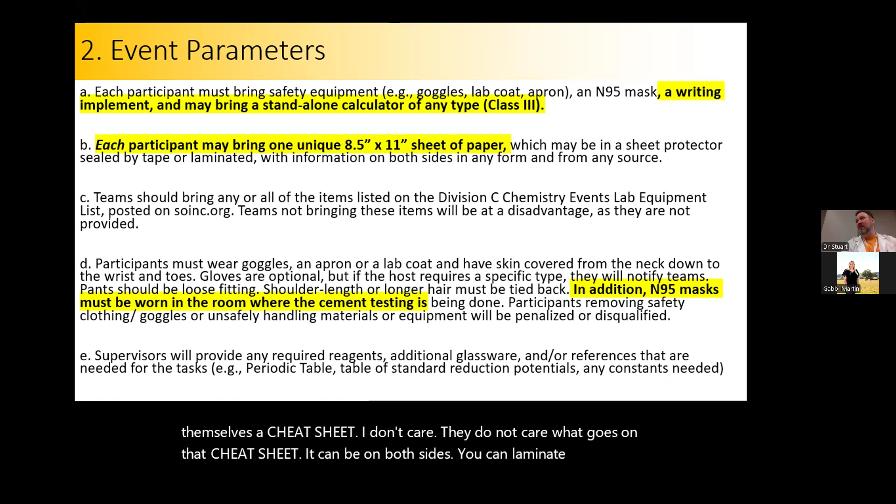Each participant may bring one unique 8.5 by 11 sheet of paper, which may be in a sheet protector or sealed or laminated with information on both sides in any form from any source. So they get themselves a cheat sheet. I don't care, they do not care what goes on that cheat sheet. It can be on both sides, you can laminate it if you want. We're not going to get that wet, but I also know what I was like when I was that age, and if I made that thing up even the day before, it would have been wrinkled, stained, and destroyed by the time I got to the actual competition, so it might be worthwhile laminating it just because I've been there and I know what that's like.

You can bring any or all of the items listed on the Div C Chemistry Events Lab list. Teams not bringing these items will be at a disadvantage. We're not going to provide everything that is on that list, but I would try to see too that for that lab component they would pretty much have all the stuff they would need other than their PPE.

Participants must wear goggles, an apron or lab coat, and have skin covered from the neck down to the wrist and toes. Closed-toed shoes - I spend a lot of time looking at people's shoes, and you guys are all well dressed for lab. Cover your sleeves, you might want to wear a lab coat to make sure your sleeves are covered, but yes, you're going to want to tie back that long hair. We may be working with open flames.

So I do have a funny story that I like to tell my students about working with open flames, because when I was in high school, there was a girl who was trying to impress the guy next to her, and there was an open flame, and she did that hair flip, and it goes right up the back of her long, kind of greasy hair, and it smelled absolutely horrible. She was freaking out, because people are smacking her on the back of the head, and her hair is on fire.

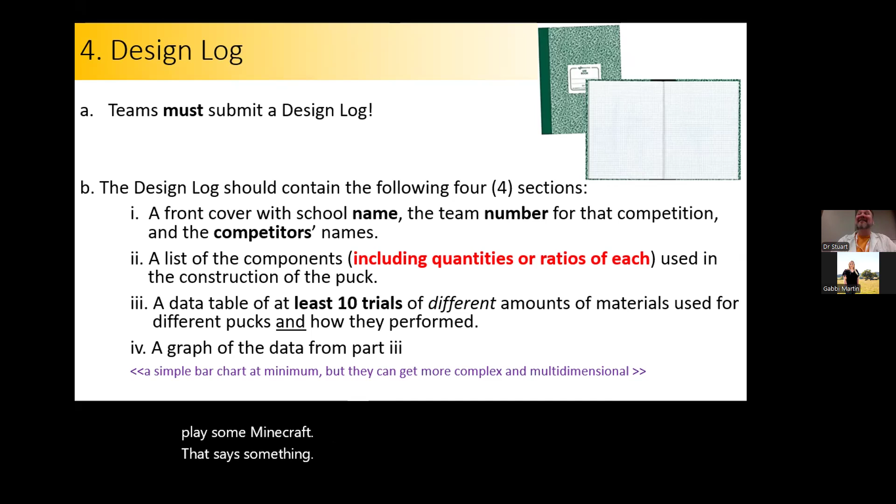For the competition part, when they're actually going to test it, we're going to be dropping these guys at heights of 20 centimeters to start, going up in 20 centimeter intervals until it cracks or reaches 100 centimeters. Tournaments will specify ahead of time what the pucks will be dropped on, and as of right now it is the lab floor - that standard hard lab floor tile stuff. I do not have a large steel plate in my possession, otherwise I would do that.

The puck testing may be done in the same room as the testing lab activities, in which case everybody has to wear their N95 mask. I will try to get us 2 rooms so we do not have to do that, because I know these things are uncomfortable.

Basically, if you're doing the lab portion, you got to wear your regular PPE. If you're doing the puck testing, it's all the things. If you're doing the test, it's none of them.

I do not think I'm going to be able to get 3 rooms. I will do my best to make people as comfortable as possible. Masks and goggles only need to be worn in the area where we're testing the lab stuff, and the mask only in the area where we're doing the drop.

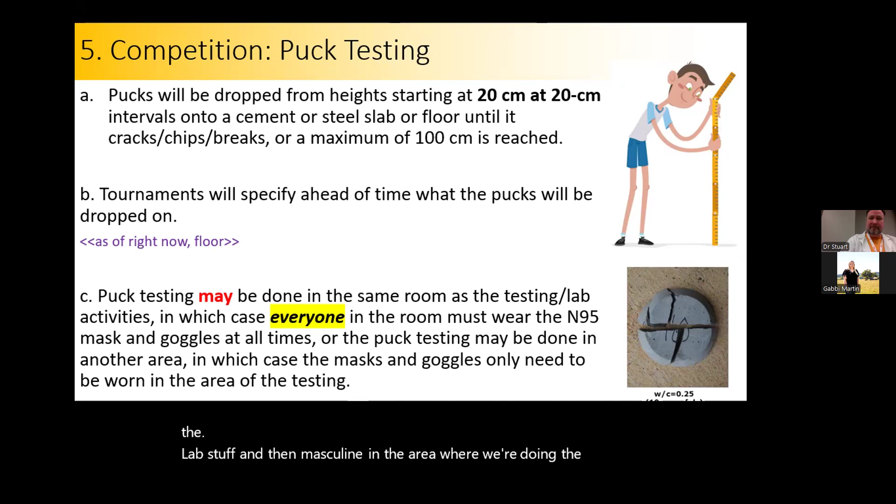All right, so pucks are going to be dropped by the students. And this is not how I would design an experiment. I would have one person consistently doing the drops, and I would have a machine doing it, but they're going to drop them. It is to their advantage to drop them as flat as possible and not throw them on the floor, but you never know. The puck should have 90-degree sides to the flat surfaces.

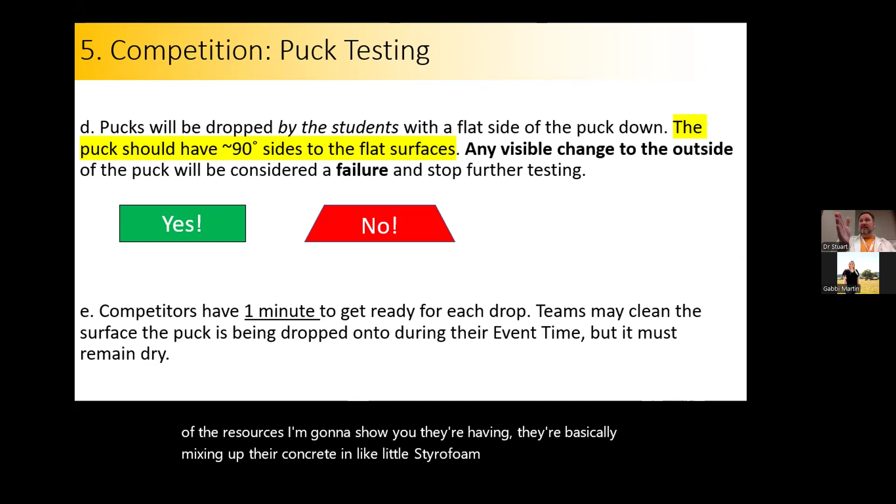All right, so that was buried somewhere in that. So straight up and down, cross, good. Slopey, no. Because if you look at that video from step 7, or one of the resources I'm going to show you, they're basically mixing up their concrete in little styrofoam bowls and using them, which is going to give it angular sides. So that would be a no. It's got to be orthogonal sides, right angles.

They have 1 minute to get ready for each drop. Teams may clean the surface the puck is being dropped onto during their event time, but it must remain dry, so they can't polish it up. They can dust it off, but they can't wash it off.

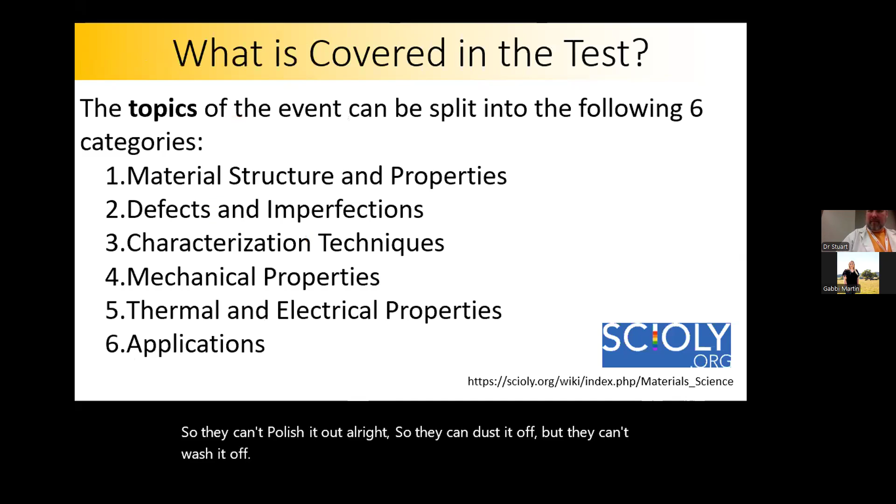All right, so that's the drop testing part. You guys have any questions about the lab notebook or how we're going to test these things? I think that part is pretty darn straightforward.

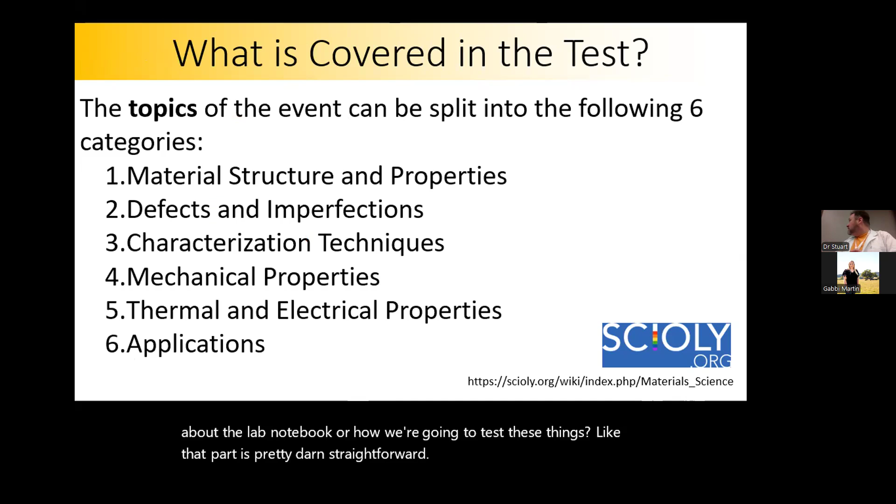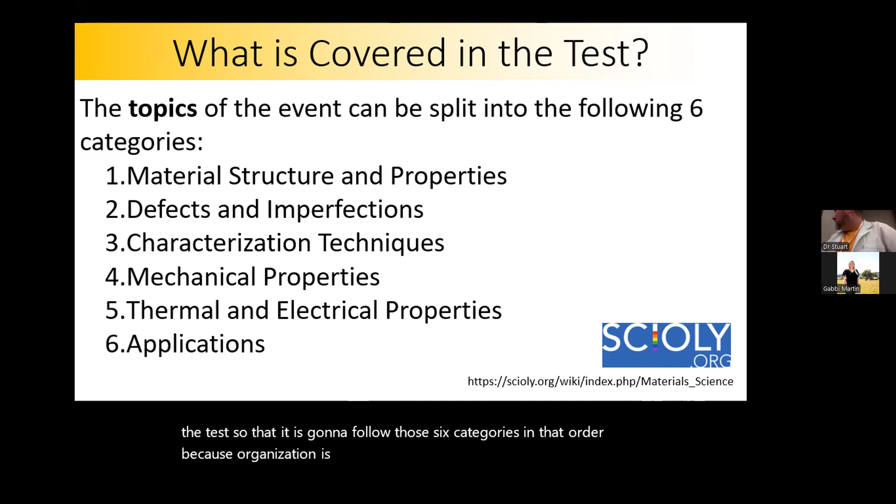Okay, the test. Now the test is not necessarily just going to be focused on concrete. There will be some concrete questions on there, 100% sure of that. But we've got a pretty big subject area to cover. The topics are going to be split into these 6 categories, and I will do my best to design the test so that it follows those 6 categories in that order, because organization is important, especially for little people. So we're going to talk about material design, material structure and properties.

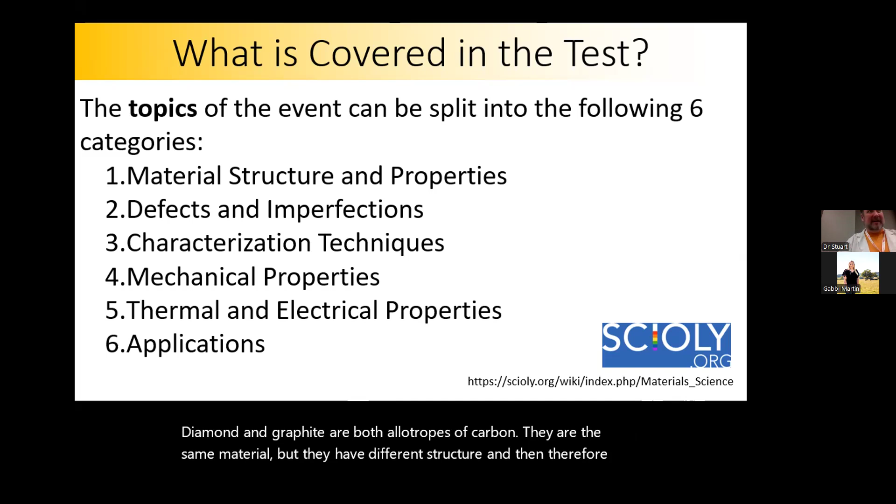So how does the structure of something change its physical properties? For example, diamond and graphite are both allotropes of carbon. They are the same material, but they have different structure and therefore radically different properties. Go try and get your fiancee a graphite ring, and you will find out that those have radically different properties.

Defects and imperfections — oftentimes we're looking at things in material science like, why did this bridge fall apart? So things like material defects and imperfections will be important. Characterization techniques are how do we know the structure of things, how are we going to classify our material?

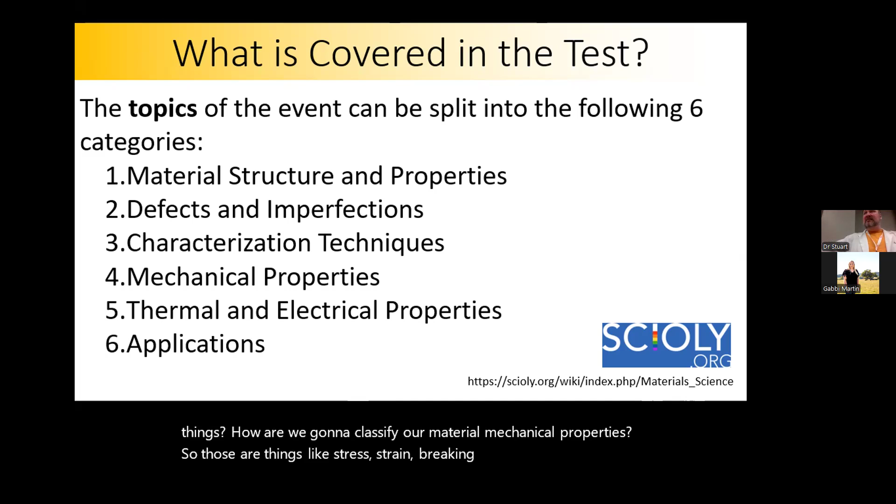Mechanical properties — those are things like stress, strain, breaking point, elastic modulus, all those physicsy things. Thermal and electrical properties — is it a good conductor of electrons or of heat? Is it a semiconductor? And then 6 is applications — what do you do with those things?

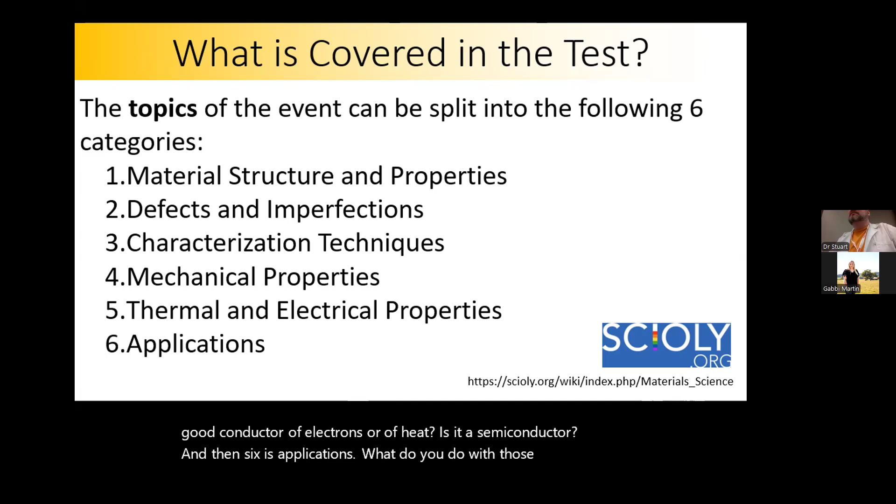If you look at the URL here, that is the SciOly wiki. That is going to give you lots of information about those 6 categories. So this is a really good jumping off place. That is probably the jumping off place I will use to make the test and be like, oh, these are definitely some things they should have seen and should know.

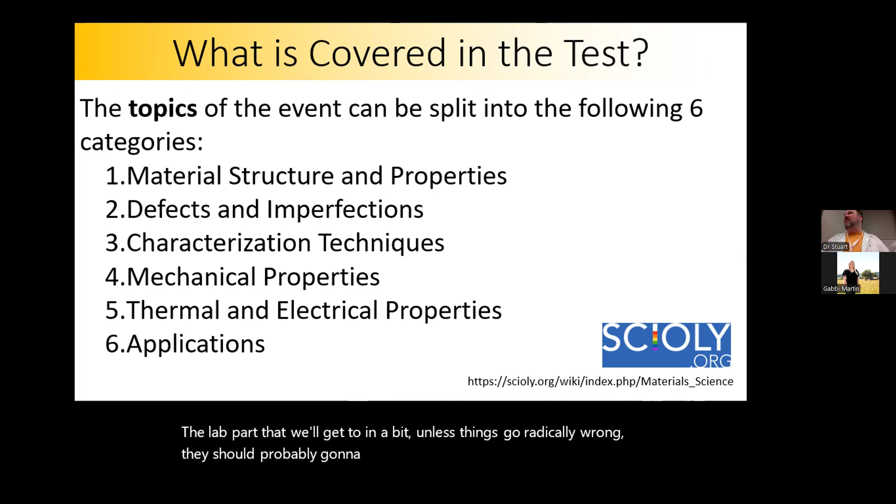I will probably find some things that are going to be a little bit harder, not necessarily pulled straight out of there, things that might make them think a little bit, because the test part, I think, is really what's going to separate one team from another team. The lab part that we'll get to in a bit — unless things go radically wrong, they should probably have roughly on-parity lab skills, I would think. And unless people do weird stuff with making their concrete pucks, that's probably not going to be a big source of difference. So it's going to be the written part.

How well did you keep track of stuff in your notebook? Do you have all 10 testing things? Do you pass the test as best you can?

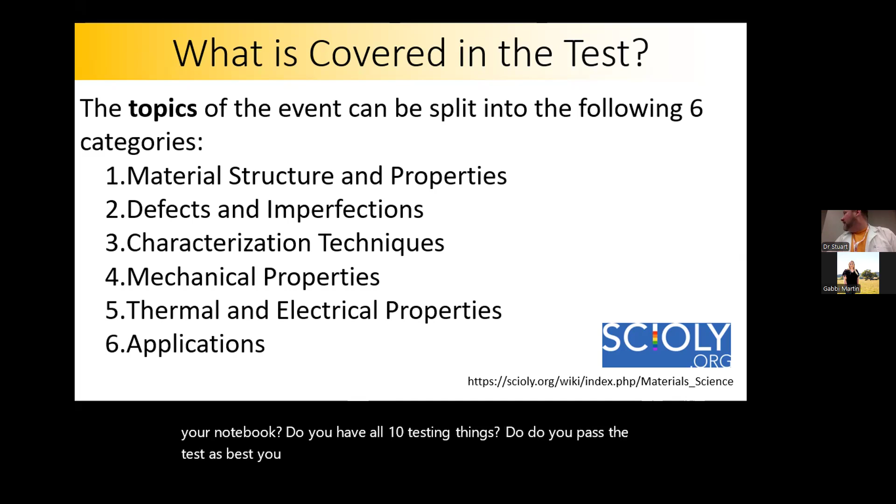That's probably where we're going to see the real differentiation, but we'll see—I've never run this particular event before. Last time I did detectors, and before that I did music, so we're in different territory for me.

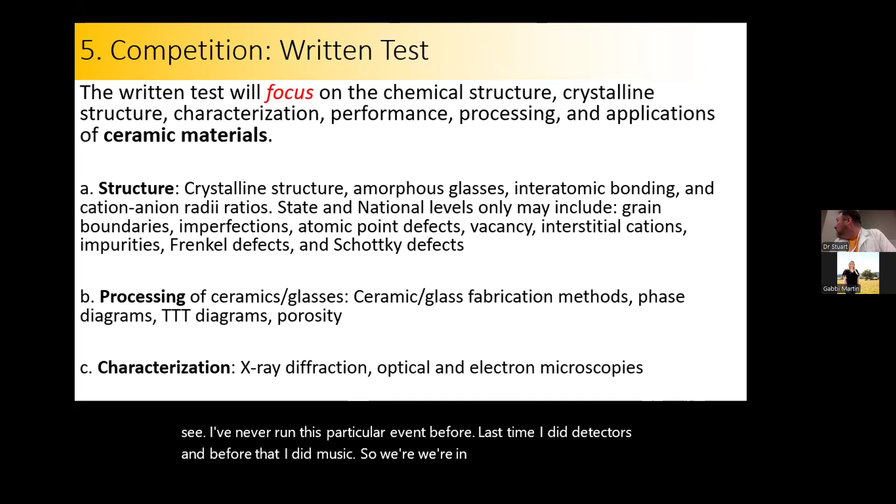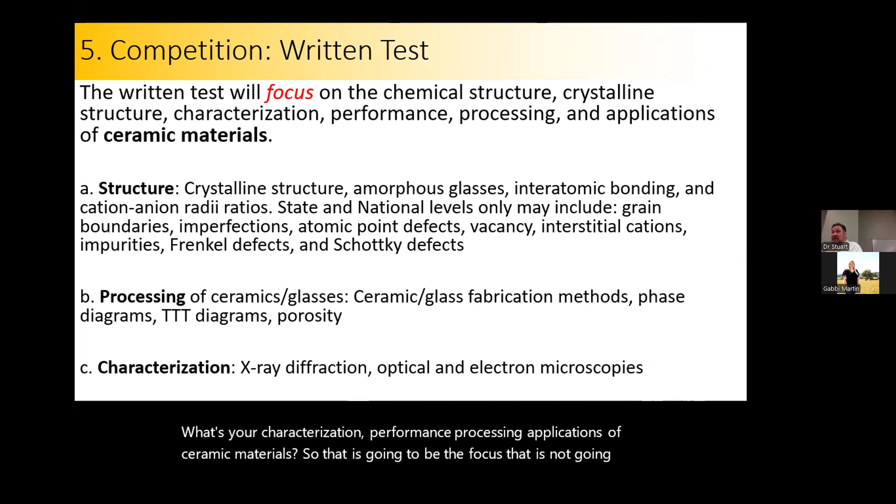The written test will focus on the chemical structure, crystalline structure, characterization, performance, processing, and applications of ceramic materials. That is the focus, but it's not going to limit things entirely—it'll be kind of focused in one area, though that doesn't mean there won't be stuff in other areas.

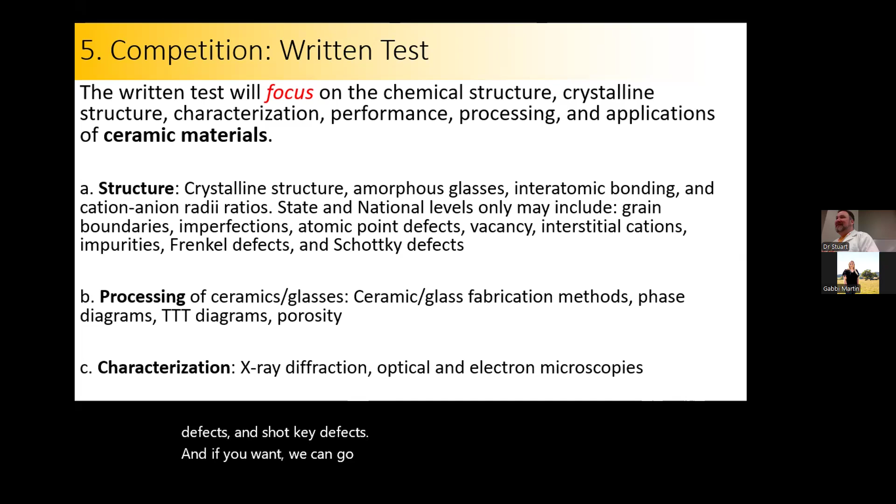For structure, we're going to cover crystalline structure in the test, amorphous glasses, interatomic bonding, cation and anion radii, state and national levels. We could include grain boundaries, imperfections, atomic point defects, vacancies, interstitial cations, impurities, Frenkel defects, and Schottky defects. If you want, we can go into some of those, but you could also just direct your students to figure out what all of those things are—it's important that they know them.

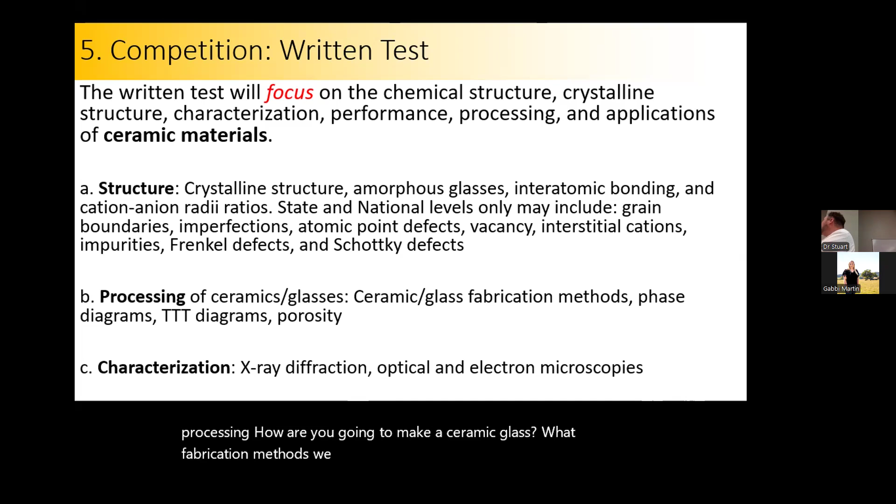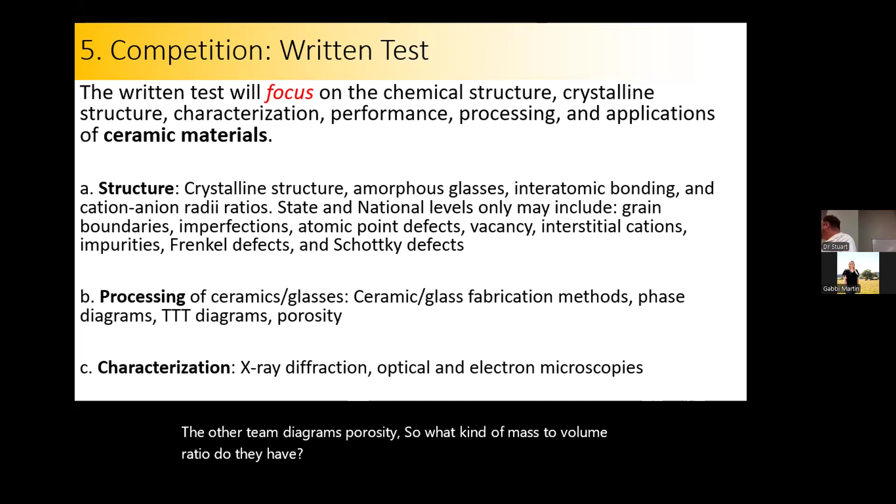Processing: how are you going to make a ceramic glass? What are the fabrication methods? We talked about phase diagrams, time-temperature diagrams, and porosity—what kind of mass to volume ratio do they have. Then different characterization techniques: X-ray diffraction, optical and electron microscopies. There are lots of different materials characterization techniques out there.

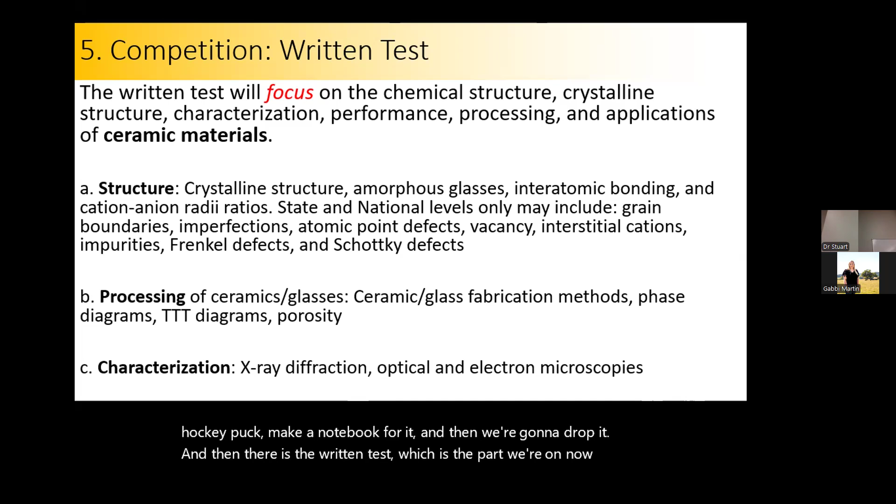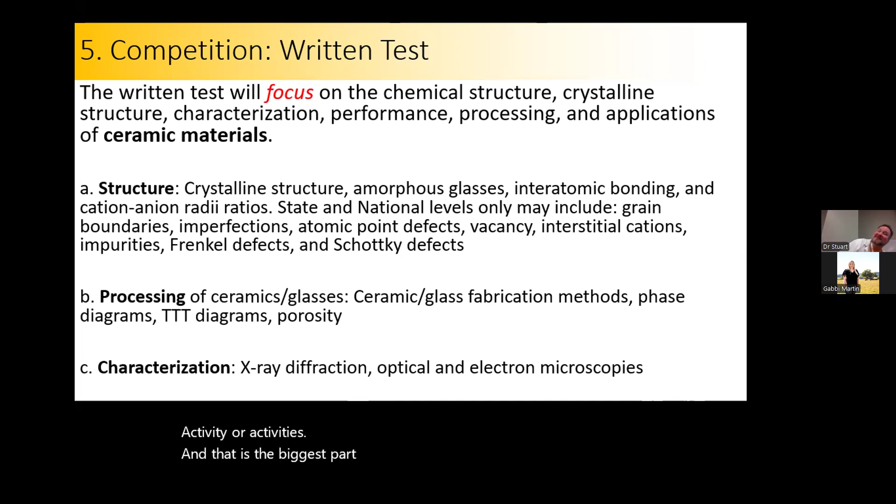Yes—there's going to be building my hockey puck and making a notebook for it, and then we're going to drop it. Then there is the written test, which is the part we're on now. And part 3 is going to be a lab activity or activities, and that is the biggest part. I'm still getting as much clarification as I can for what is legit in there, but they're going to need to come in, put their lab coats on, and do something in the lab.

So if I have my students—and I do have a couple interested in concrete—if they're doing a lab notebook to build and test, we format that. Is that notebook going to have to be impounded or anything? Are they going to have access to it?

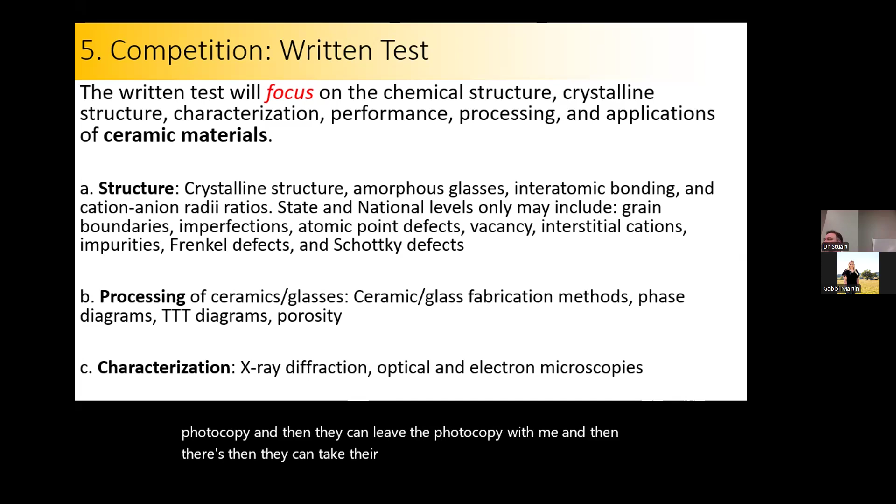I do not know. It didn't say that I'm going to collect those notebooks and give them back or not give them back. My suggestion, which would tremendously help me out, is if they could just make a photocopy—keep the physical original copy, leave the photocopy with me, and take their original back with them. That avoids the question of whether I need to impound it, so I don't have to quickly go through and check all their stuff, or have the TAs do that.

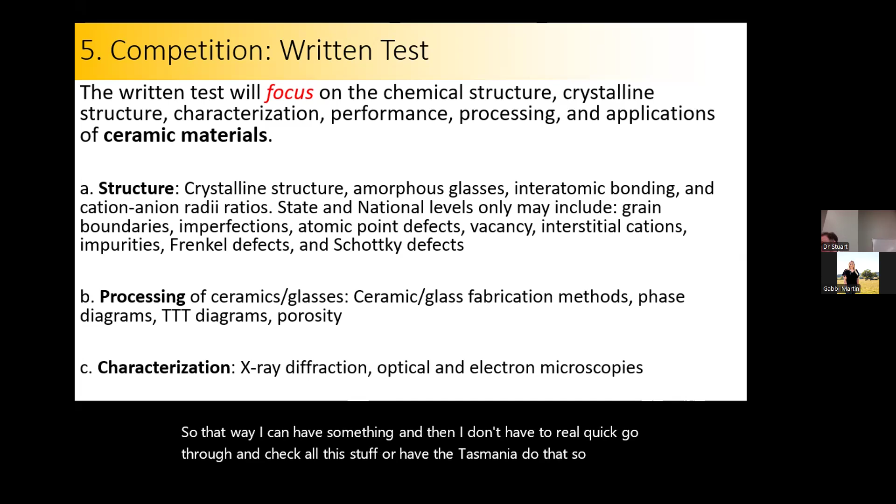So they can bring in one sheet of paper per person. But they couldn't have their notebook in that, could they? Like the notebook wouldn't be allowed for the written test? No—that's the way I'm going to have them do their research, it's going to be all in that lab notebook. Okay, I see what you mean. That's fine.

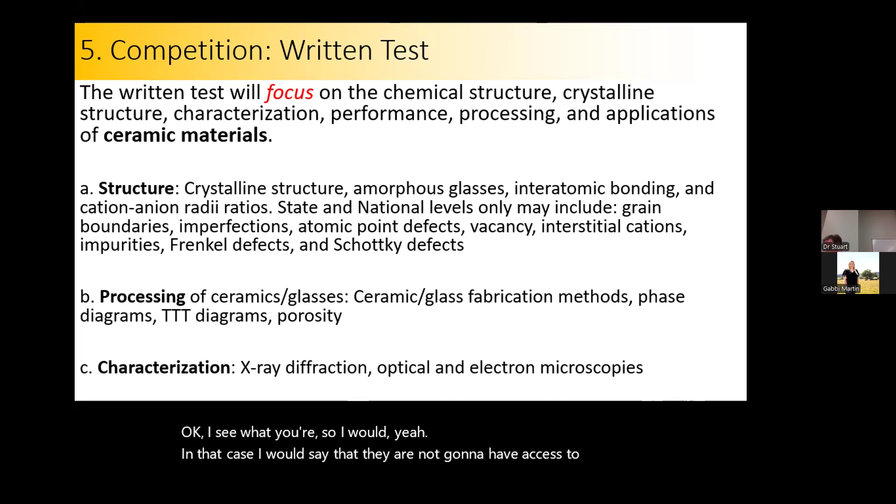In that case, I would say they're not going to have access to that notebook—transfer the stuff to their laminated 2-sided sheet per person. Other questions? All right, carrying on.

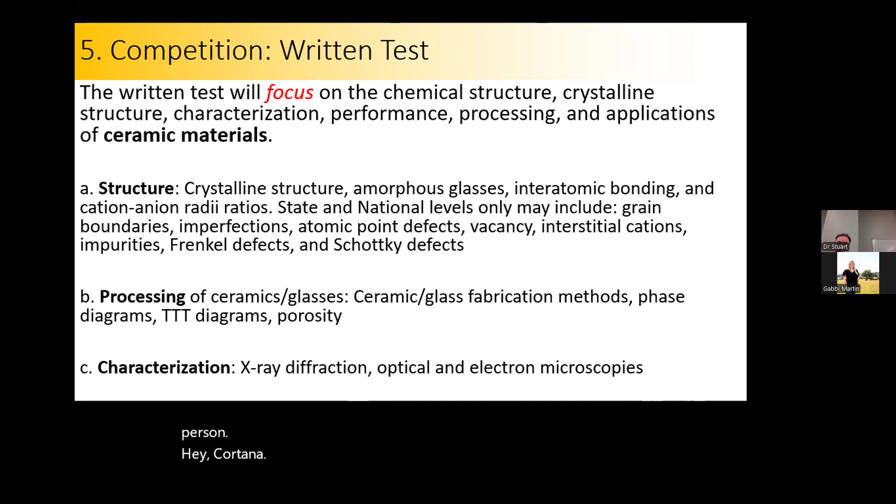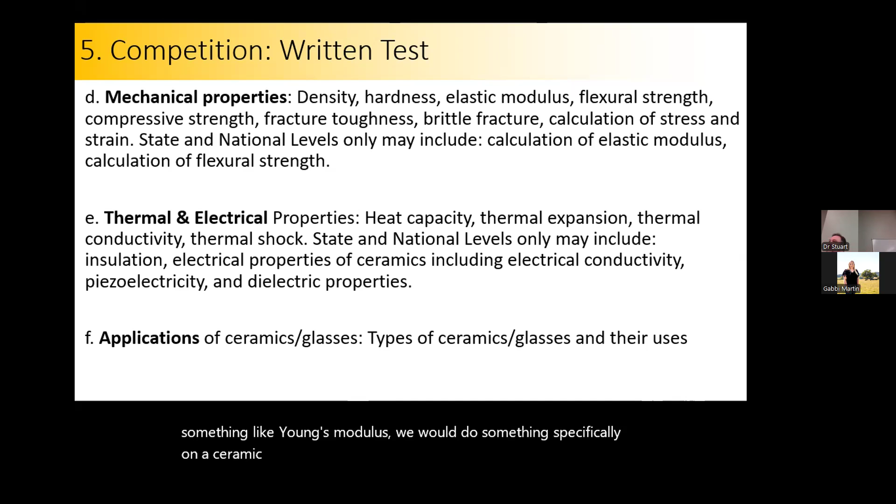How do you characterize those things? Could be part D: mechanical properties—density, hardness, elastic modulus, flexural strength, compressive strength, fracture toughness, brittle fracture, calculation of stress and strain. We could include calculation of elastic modulus and calculation of flexural strength. So when they say focused on ceramics, for something like testing Young's modulus, we'd use specific examples on a ceramic material rather than a metal—try to make the specific examples ceramic-y.

Thermal and electrical properties: heat capacity, thermal expansion, thermal conductivity, thermal shock. Also insulation, electrical properties such as conductivity, piezoelectricity, or dielectric properties. And then F would be applications of ceramics or glasses. So what are we going to use ceramics and glasses for?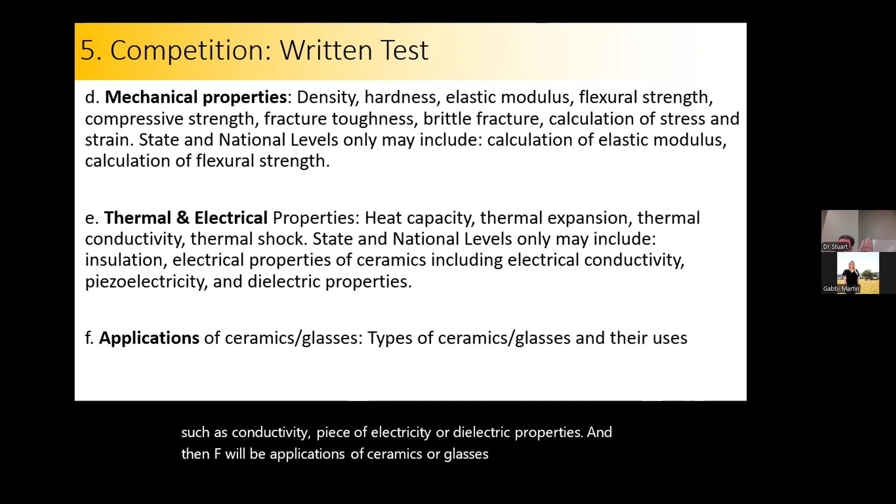All right, competition part 5 is the lab activity. At least one lab activity must be performed in addition to the puck testing and written test. Topics for the lab activity shall be consistent with the topics listed under part 2 written test. So since it's material science, that's a really broad category.

If you go to the URL, they have this list of core competencies for the chemistry stuff as part 1 of this document. Pretty straightforward there. That's the URL for what you're expected to know for chemistry.

It's basic stuff, like you know how to wear your PPE correctly, and your goggles go on your eyeballs, not on your forehead. You only need to see somebody in a small lab explosion have their face covered with shards of glass and full of blood, and you're like, maybe I should wear my goggles. So things are a lot safer now than they used to be. So, are you wearing your PPE?

You should know how to light a match, a candle, and a Bunsen burner. My first job as a TA, we're doing an experiment, we had to light our Bunsen burners. Everybody's got theirs, including two ding dongs in the back right of the room, and I'm making sure they're not getting too much Bunsen burner. In the front there were two ladies whose Bunsen burner wasn't lit. I asked what's wrong, and they said, oh, we always had a boy do it for me. I was so mad. I said, you guys are going to light and relight that Bunsen burner five times while I'm watching, not a boy do it for me. So make sure they know how to light a Bunsen burner by themselves.

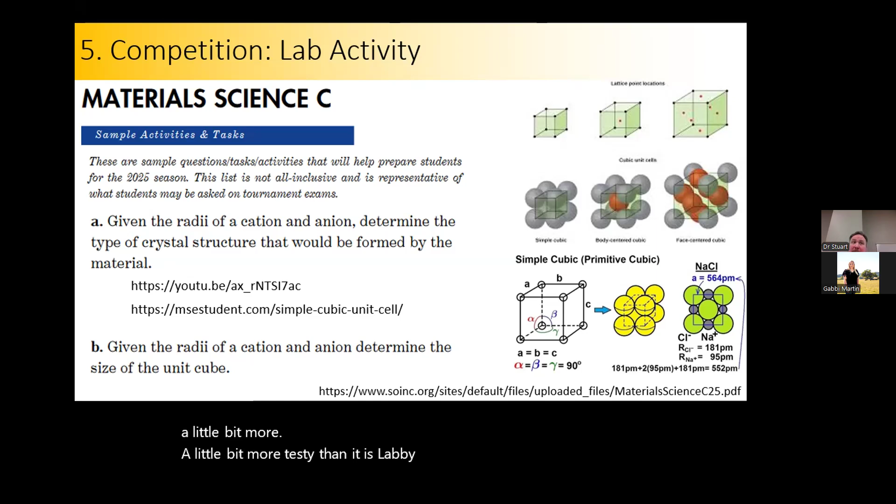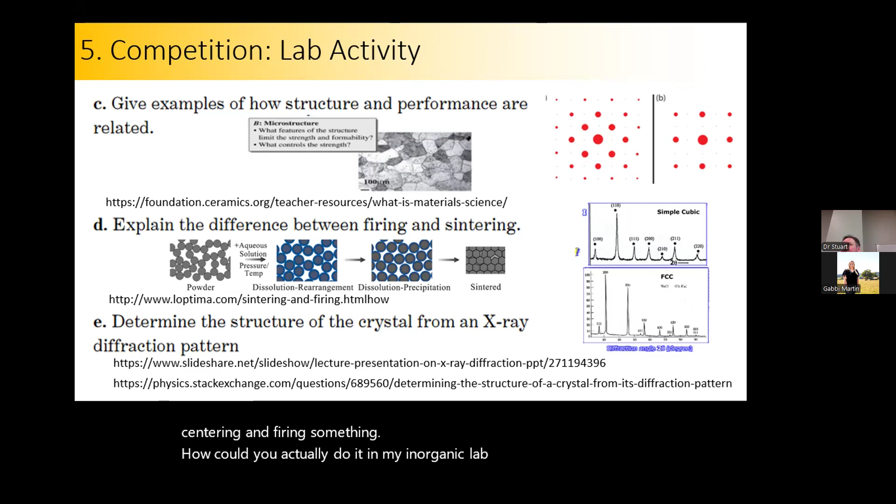Know the differences between sintering and firing. There's a URL on there that tells you the difference between sintering and firing something, which we actually do in my inorganic lab. We made a phosphor the other day and then used that to make some glow-in-the-dark dinosaurs.

So determine the structure of the crystal from a diffraction pattern. There are two different diffraction patterns. One is going to be a 2D diffraction pattern, and the other is going to be an angular-based diffraction pattern. So identify which of those is simple cubic and which one is face-centered cubic.

I do not think I would ask them to actually run the math on that, just because that would be kind of hard to do.

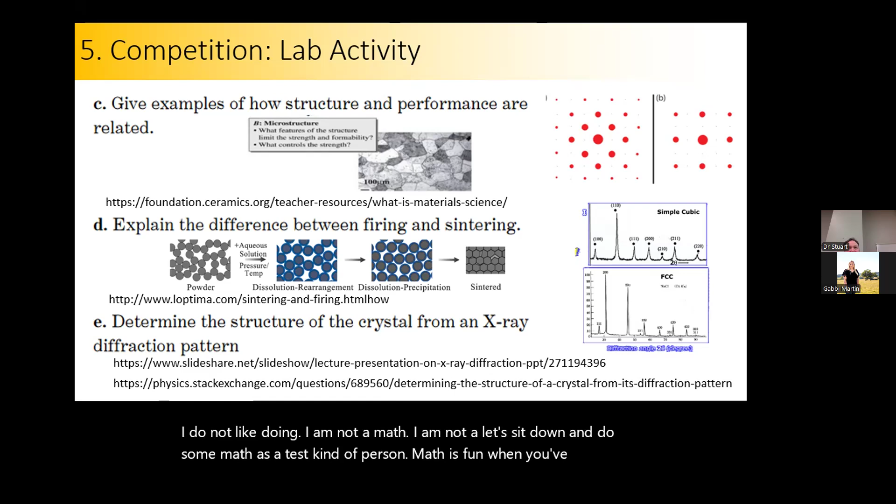That is something I do not like doing. I am not a math person, not a let's-sit-down-and-do-some-math-as-a-test kind of person. Math is fun when you've got plenty of time to do it, not when you're being forced to do it fast. Fast math is bad math.

But recognizing which pattern goes with which crystal structure, I think that would be askable. These are some of the examples I found.

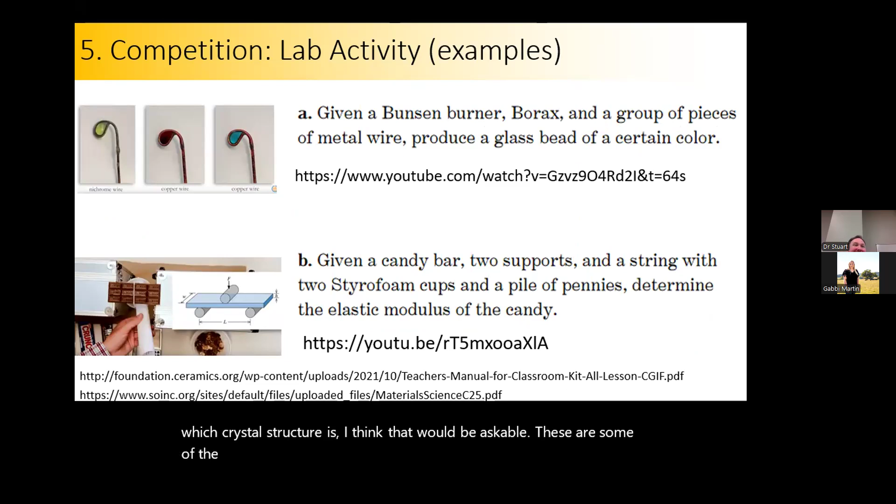Given a Bunsen burner, borax, and a group of pieces of metal wire, produce a glass bead of a certain color. If you go down to this, this is where I got these A, B, C's, and D's, from the official website. But then this teacher manual for classroom kit, all lessons CGIF PDF, that's a lot of these activities. So my suspicion is that's where they got a lot of these ideas from.

So number one is given a Bunsen burner, borax, and a group of pieces of metal wire, produce a glass bead of a certain color. There's a little YouTube video for that, so we can watch that if you want.

B, given a candy bar, two supports, and a string with two styrofoam cups and a pile of pennies, determine the elastic modulus of the candy. Basically, they're going to take a candy bar, put it between two fixed points, and add mass to it until the candy bar breaks. And you can figure out what your elastic modulus is.

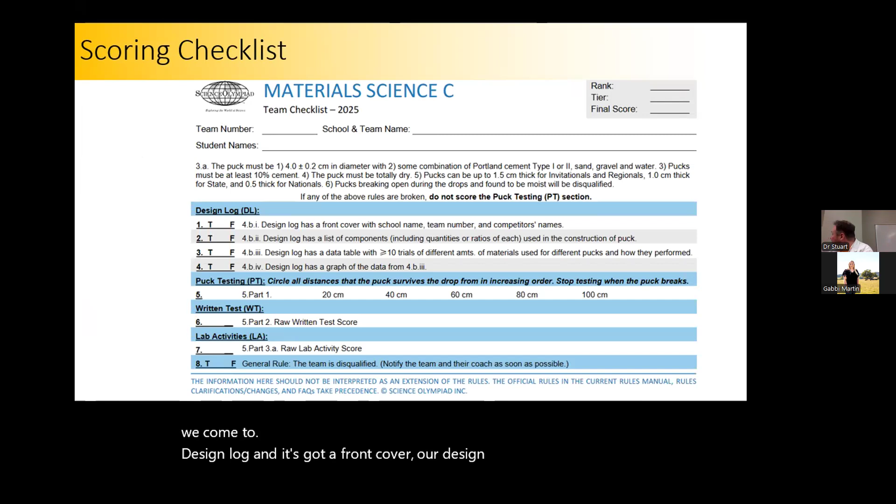So we'll look at the design log, and it's got a front cover. Our design log has the components and the ratio of each used in the construction of the puck. It's got the data table with the 10 different trials, and it's got a graph.

So we'll go through in true and false all of those things. We're going to circle the distance at which it falls apart, and we're going to give them the written test score and the raw lab activity score. Those will end up getting normed to whatever the highest score is for part 6 and part 7. And then there's a field for, do they get DQ'd? I've never had to DQ somebody before, so I hope I don't have to now.

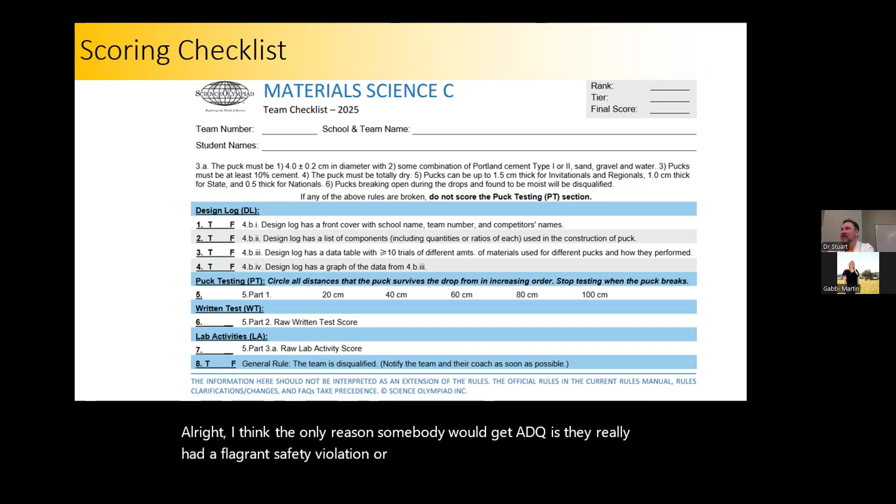Okay, questions about what's going on this thing? I think the only reason somebody would get a DQ is they really had a flagrant safety violation, or they didn't let their hockey puck dry out. So let's make sure that those things are good and dry.

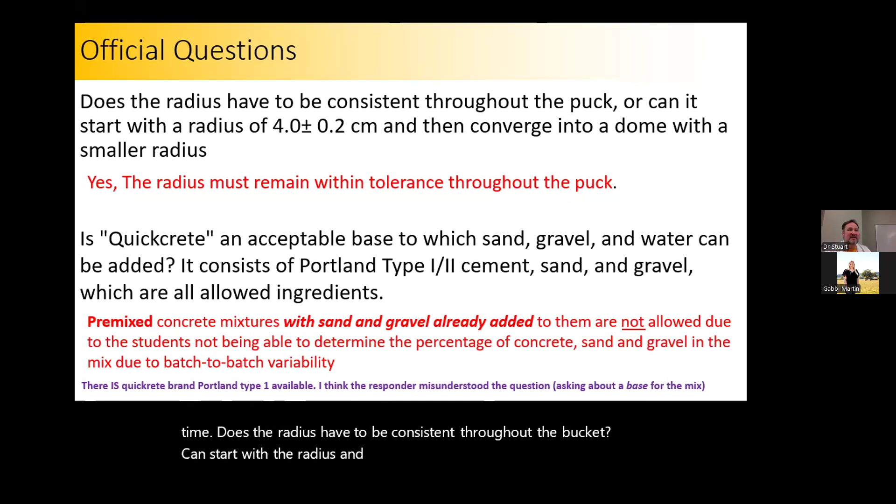Does the radius have to be consistent throughout the puck? It can start with a radius and then converge into a dome with a smaller radius. And the answer is it has to be consistent, plus or minus 0.2 centimeters the whole way through.

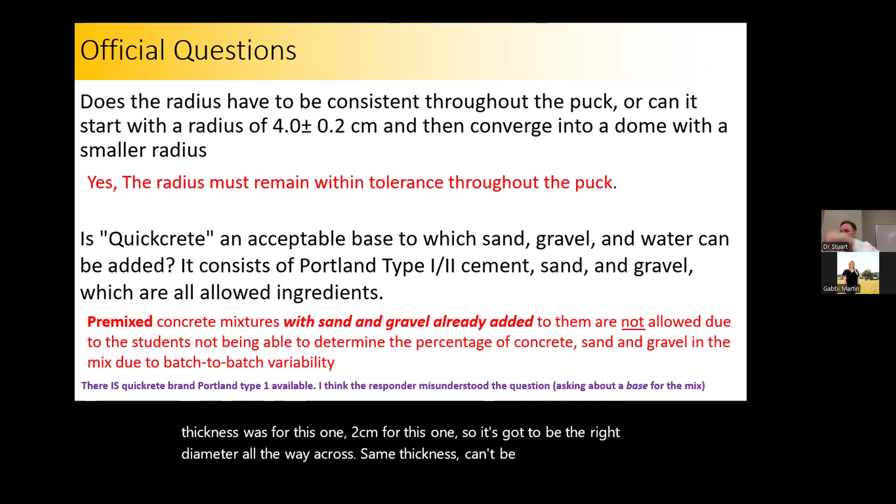The thickness, I forgot what our thickness was for this one, 2 centimeters for this one. So it's got to be the right diameter all the way across, same thickness. Can't be all wavy gravy. It's got to be round, or a good approximation for round.

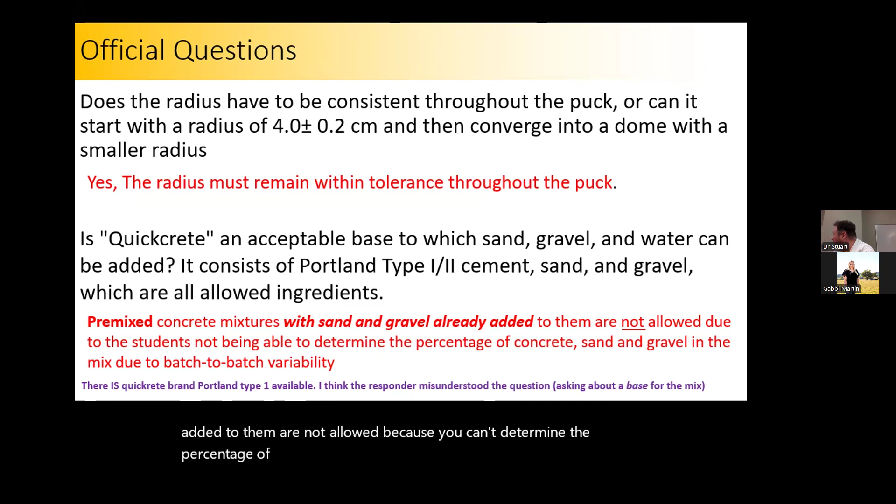Is Quikrete an acceptable base to which sand, gravel, and water can be added? It consists of Portland type 1-2 cement, sand, gravel, which are all allowed ingredients. And it says pre-mixed concretes with sand and gravel already added to them are not allowed because you can't determine the percentage of concrete, sand, and gravel in the mix due to batch variability.

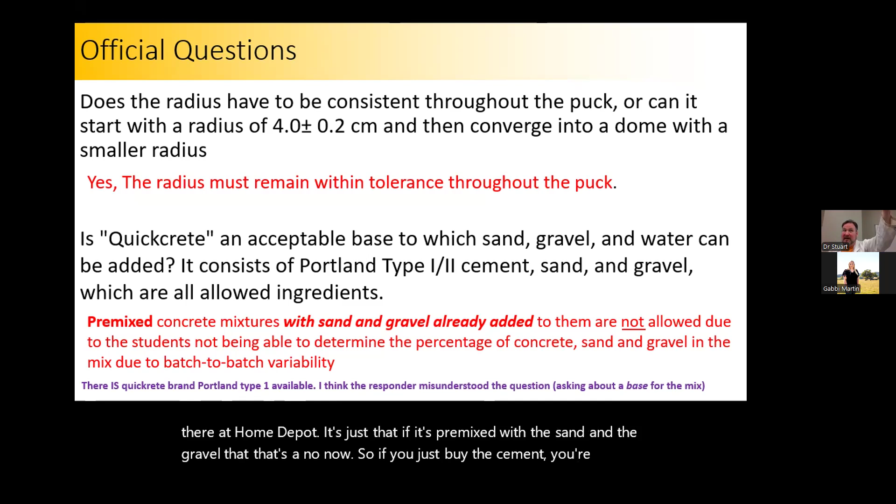I think that whoever answered this kind of misread the question, because you can buy Quikrete brand Portland type 1 cement out there at Home Depot. It's just that if it's pre-mixed with the sand and the gravel, that's a no-no. So if you just buy the cement, you're good. If you're buying it pre-mixed with sand and chunky bits in it, no. So no chunks, right?

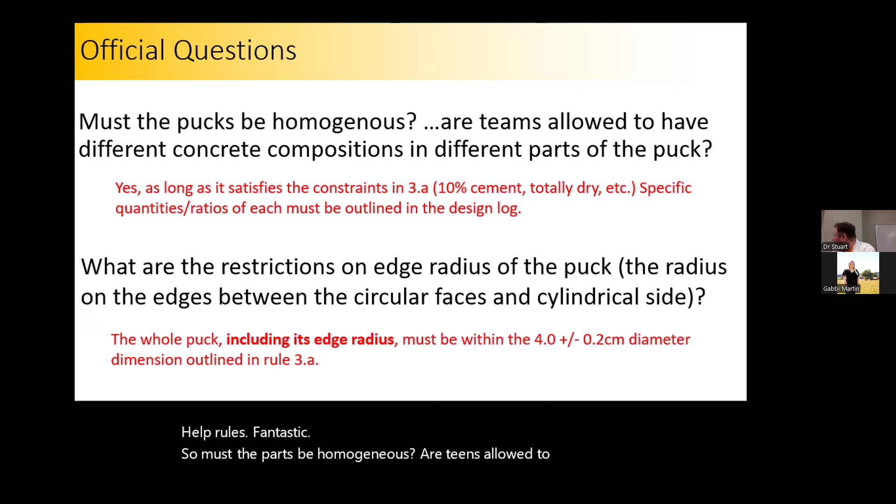So must the pucks be homogeneous? Are teams allowed to have a different composition in different parts of the puck? And the answer is you can have different compositions throughout the puck as long as it is 10% cement and sand and gravel make up to the rest of it.

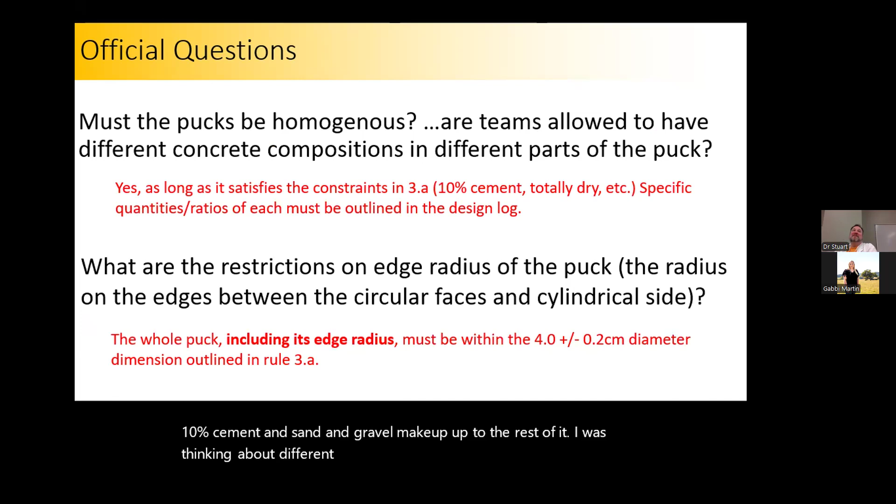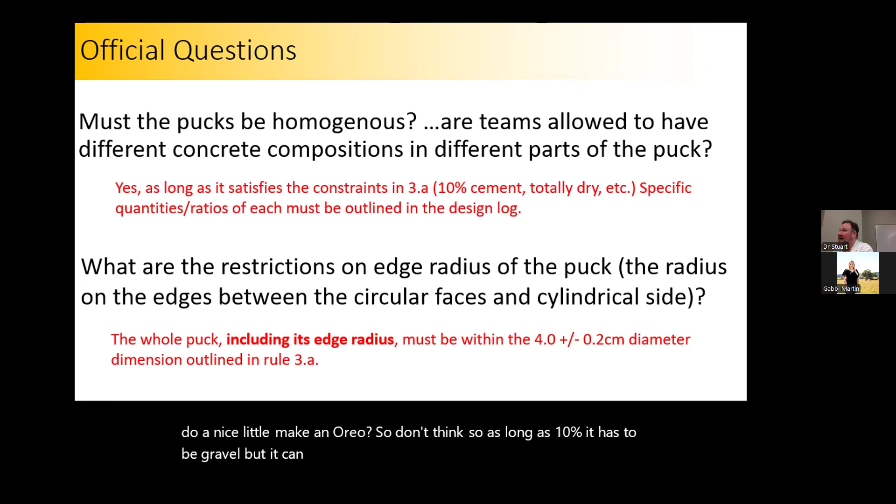I was thinking about different ways you could possibly cheat on this, or what I would do as a clever student, like, can I get a chunk of marble and then make a nice little Oreo? I don't think so, as long as it's 10% and it has to be gravel, but it does not have to be homogeneous. Which would be really hard because it's an aggregate material, so making it homogeneous would be next to impossible anyway. But I think it's really like, can I make an Oreo? And I think the rules say yes.

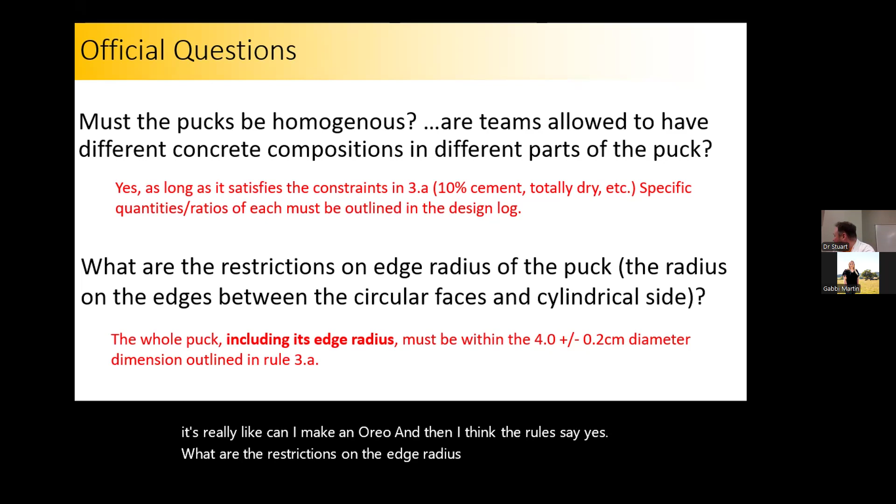What are the restrictions on the edge radius? Does it have to be perfectly cylindrical? And the answer is yes, the edge radius must be within that diameter, plus or minus 0.2 centimeters. So I will be buying myself some calipers to make sure these guys fit within the rules.

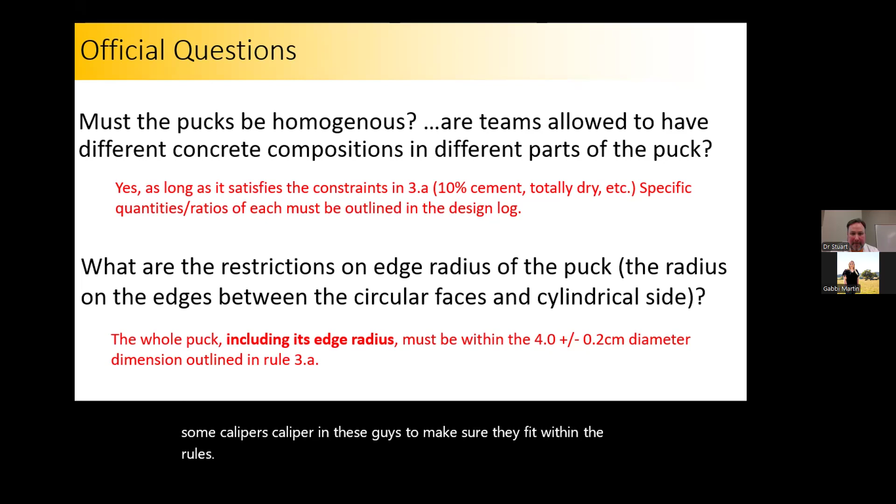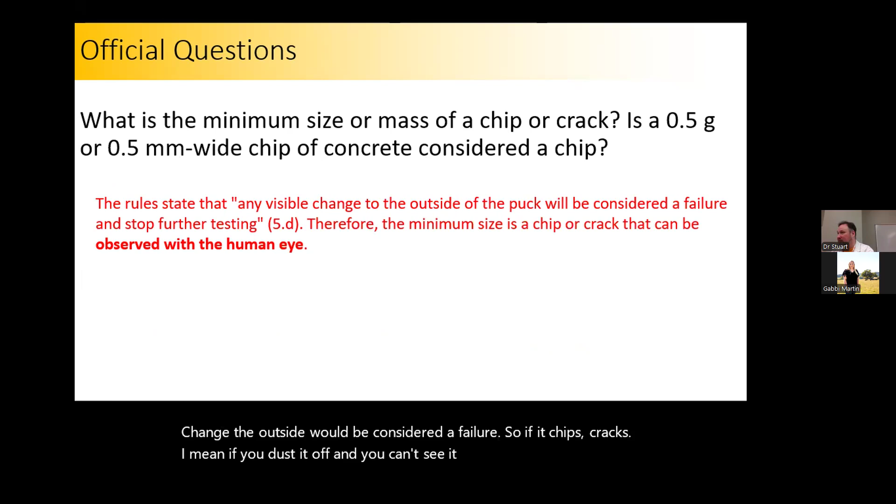What is the minimum size of a chip or a crack? It's any visible change to the outside will be considered a failure. So if it chips, cracks, I mean, if you dust it off and you can't see it, then good. But otherwise, if it's visible to the human eye, it did not pass that test.

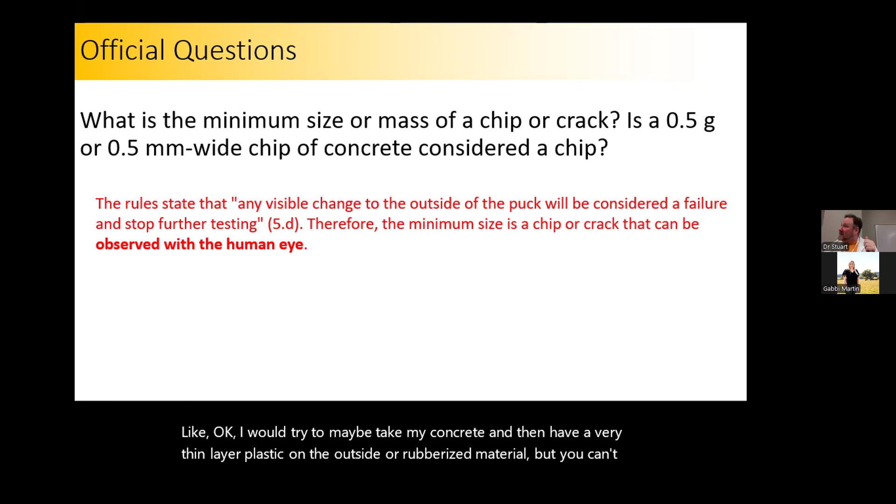Yeah, I was thinking like, what would I do? Like, okay, I would try to maybe take my concrete and have a very thin layer of plastic on the outside or rubberized material, but you can't because it's got to be sand, gravel, and cement. So those are your only 3 allowable materials.

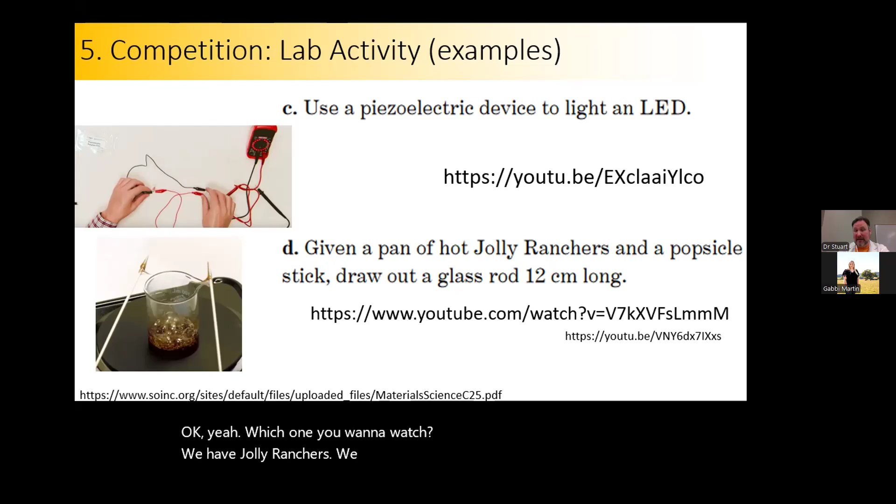Okay, yeah, which one do you want to watch? We have Jolly Ranchers, we have piezoelectric LED, we have Bunsen burner and glass, or chocolate bar. Or do you want to watch where to go, the concrete brick one? Making a concrete brick, find that one there. What are you feeling?

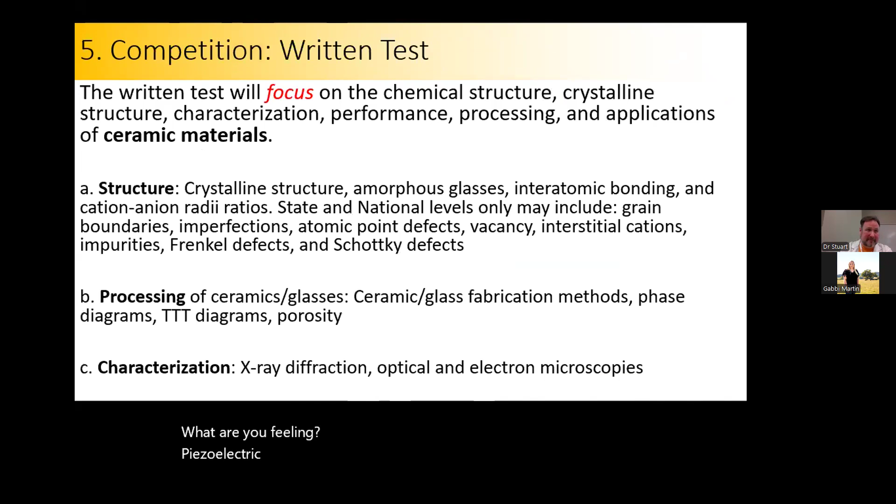Piezoelectric, to light up an LED.